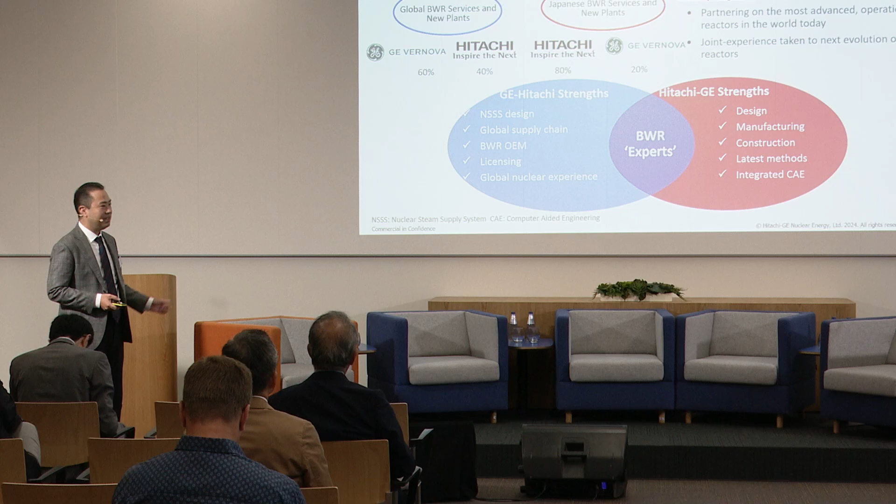I start with the Hitachi-GE overview. This slide may be the most important point of today's presentation, showing the Hitachi and GE Vernova Global Nuclear Alliance. As shown top left, we have GE Hitachi Nuclear Energy based in the United States, and Hitachi-GE Nuclear Energy based in Japan. Both companies have the same parent companies, GE Vernova and Hitachi, but the shareholder percentages are different.

GE Hitachi Nuclear Energy handles global BWR services and new plants, while my company, Hitachi-GE Nuclear Energy, handles Japanese BWR services and new plants. For example, if BWR X300 is built in Estonia, GE Hitachi will lead that new build project. If BWR X300 is built in Japan, Hitachi-GE will lead the project.

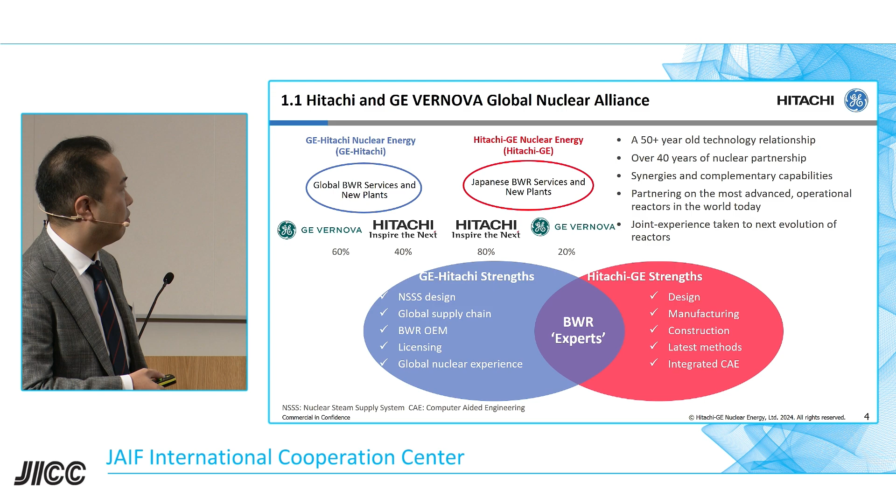GE and Hitachi have a more than 50-year-old technology relationship, and for the nuclear part, over 40 years of partnership. GE Hitachi and Hitachi-GE have synergies and complementary capabilities between the two companies. We are now partnering on the most advanced operational reactors in the world today, the BWR X300, bringing joint experience to the next evolution of reactors.

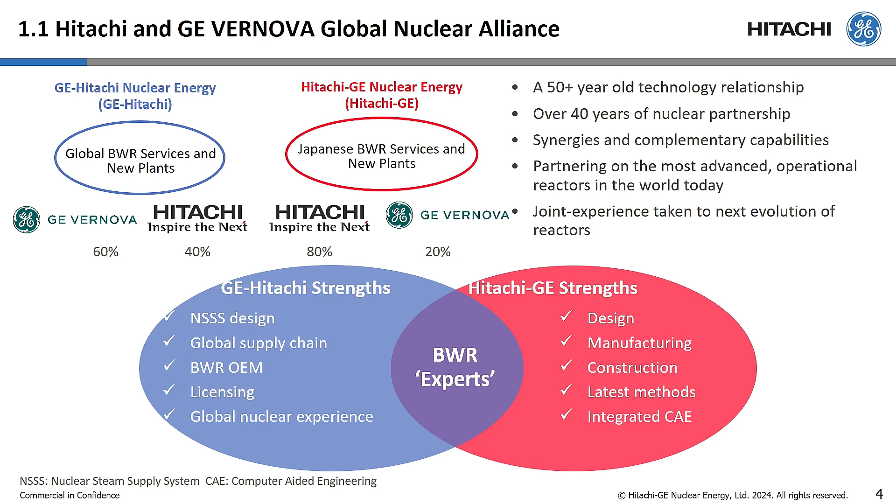GEH and Hitachi-GE have their own strengths. GEH's strengths are in NSSS design, global business, global supply chain, BWR OEM licensing experience, and global nuclear experience as a whole. Hitachi-GE has design capabilities and factories in Japan, so we can manufacture key components of BWR reactors. We also have rich construction experience in Japan for more than 40 years, and we can apply the latest construction methods together with integrated CAE.

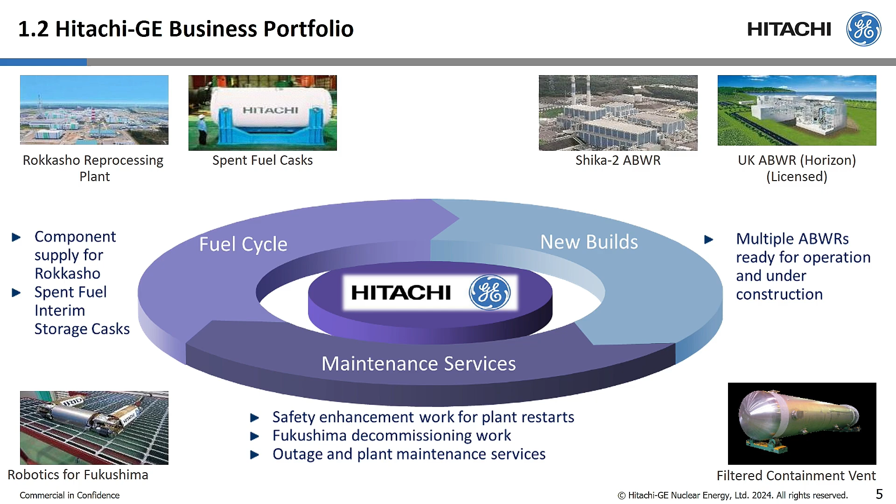This slide shows the Hitachi-GE business portfolio. HGNE covers front-end new builds to back-end business in Japan. As for new builds, multiple ABWRs are ready for operation, and we are currently focusing on the restart of existing plants, especially maintenance services such as safety enhancement work for plant restarts and Fukushima decommissioning work.

Once existing plants start again, we can begin outage and plant maintenance services. For the back-end, we provide component supply for the Rokkasho reprocessing plant, and we also produce spent fuel interim storage casks.

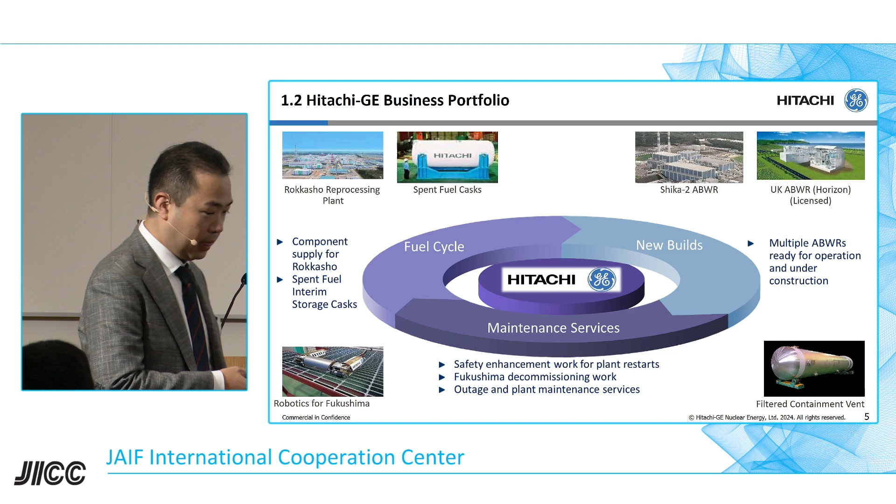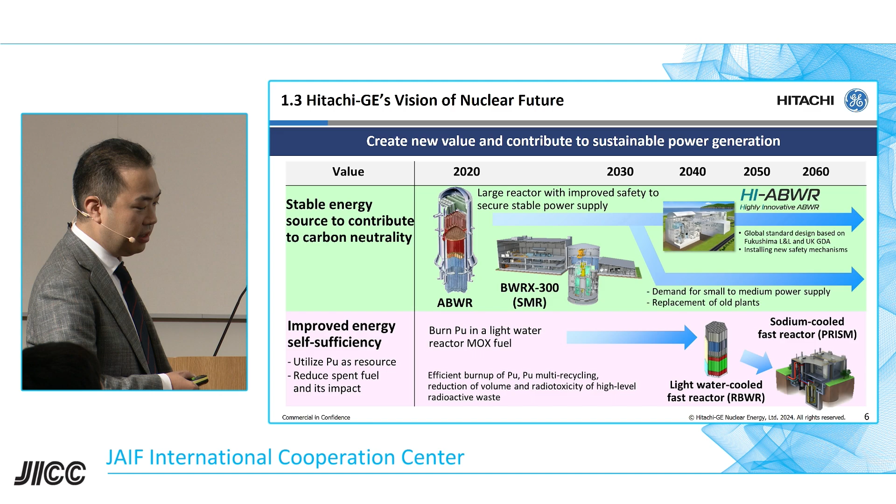This slide shows HGNE's vision of the nuclear future. The value of a nuclear power plant is to produce a stable energy source to contribute to carbon neutrality. We have constructed multiple ABWRs in Japan, which are large water reactors, and we are now developing so-called highly innovative ABWRs, equipped with global standard design based on Fukushima lessons learned and UK GDA experience, installing new safety mechanisms. This is also a large water reactor.

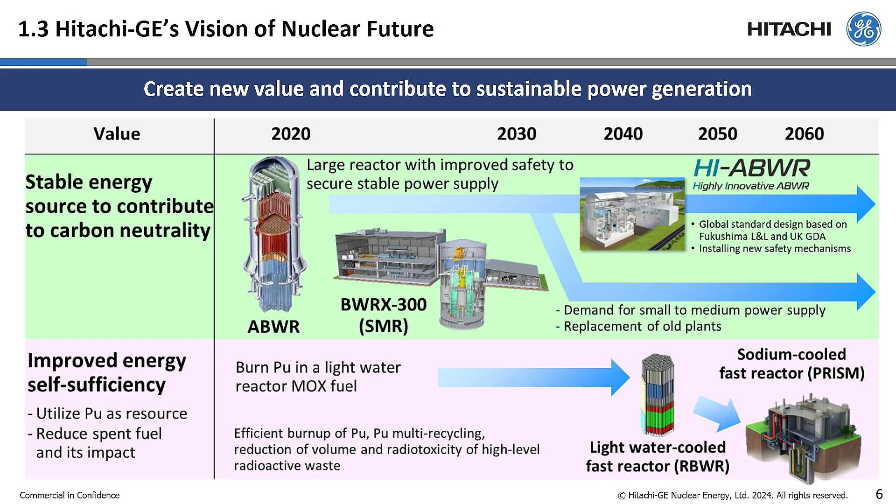In addition to large water reactors, GEH and HGNE are now developing BWR X300, which will meet the demand for small to medium power supply and replacement of old plants. Today's presentation will focus on the upper side of this chart, light water reactors.

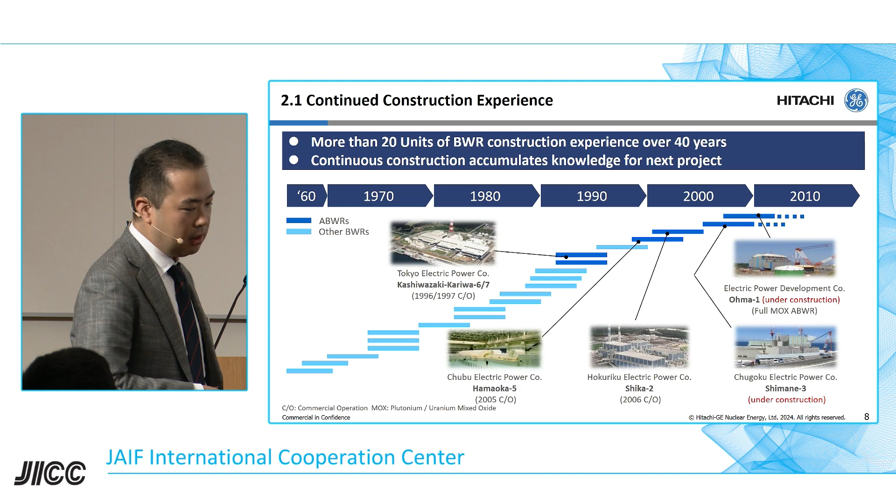Now I move on to Hitachi-GE experience. Toba-san already explained the continued construction experience of Japanese BWR plants. HGNE's construction experience began in the 1960s. Since then, HGNE has built more than 20 units of BWR, with over 40 years of construction experience. From the 1990s, HGNE has built 4 ABWRs, with 2 additional ABWRs under construction.

As Toba-san already touched on, Shimane 3, Ohma 1, and Higashidori are also part of the next series of ABWRs. So I can say we have continued experience in BWR construction, but I intentionally stopped this chart at 2010 because after the Fukushima accident, we have had no new construction activities in Japan. Later I will touch on what we did after the Fukushima accident to keep our capabilities and knowledge, so the younger generation can take over our capabilities.

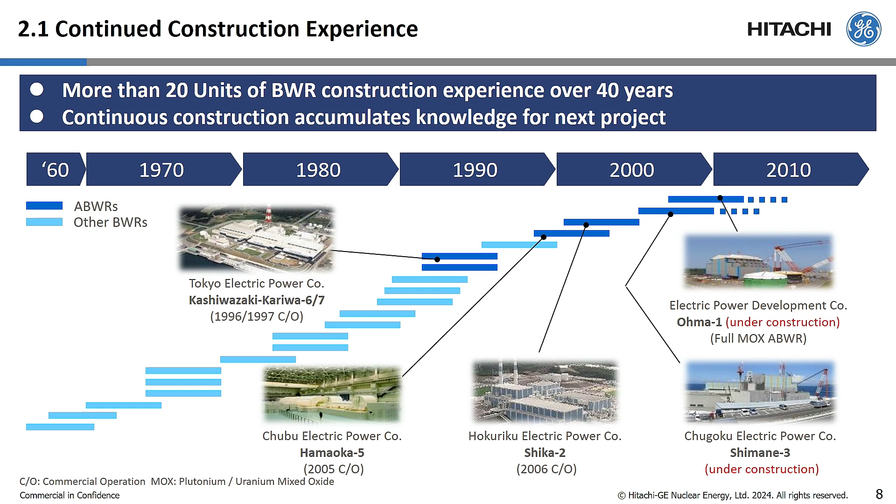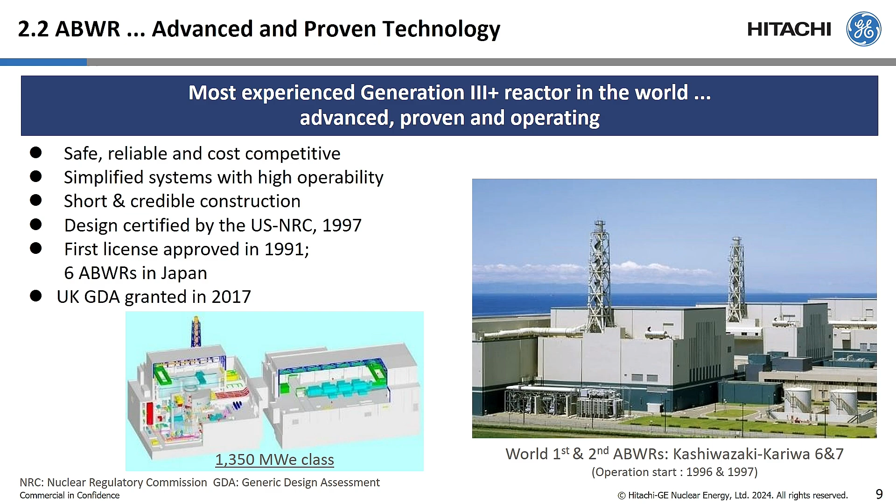Okay, so this is a brief introduction of ABWR. So HGNE's latest large reactor design is ABWR, which is the most experienced generation 3+ reactor in the world. So features of ABWR are safe, reliable, and cost competitive, simplified system with high operability, short and credible construction.

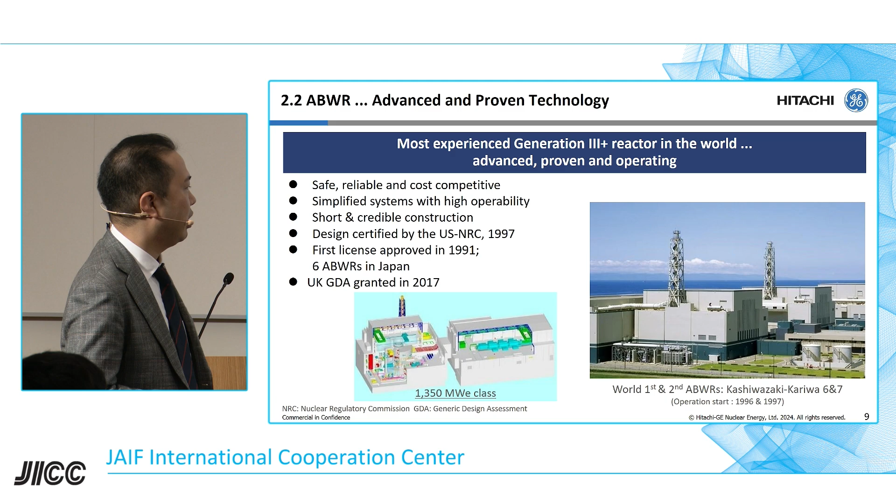And we got design certified by the US NRC in 1997, and the first license approved in 1991, and now we got 6 ABWRs in Japan. And UK GDA granted, we got GDA in 2017. So this is a picture of the world's first and second ABWRs, Kashiwazaki-Kariwa 6 and 7.

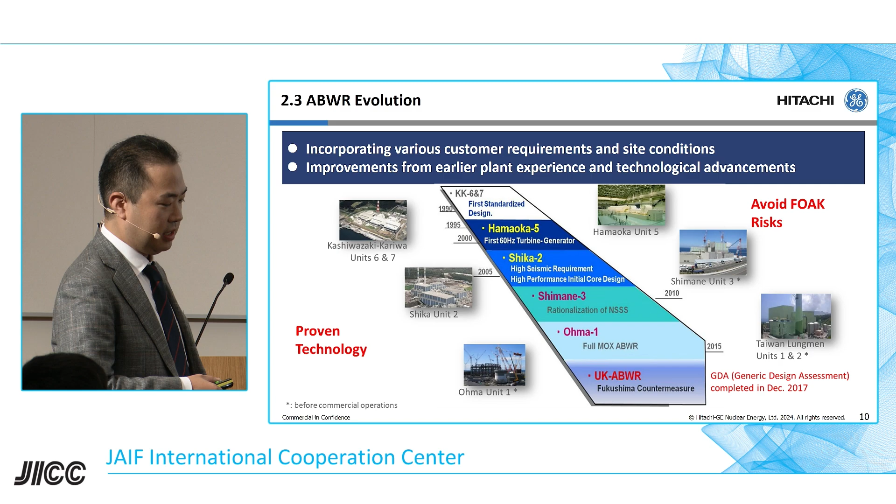So although ABWR is the latest design, it's been incorporating the various customer requirements and site-specific conditions in Japan and overseas. So starting from Kashiwazaki-Kariwa 6 and 7, each plant has each new feature, but the important thing is that ABWR is proven technology, and ABWR can avoid FOAK risks.

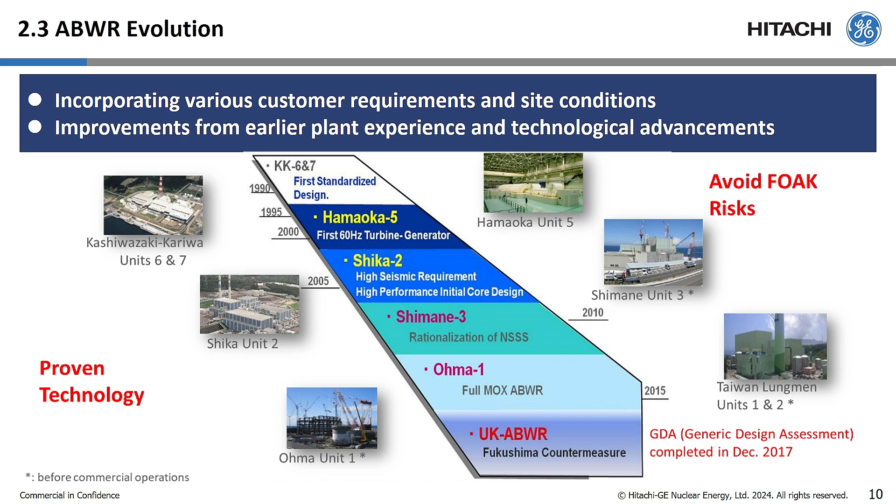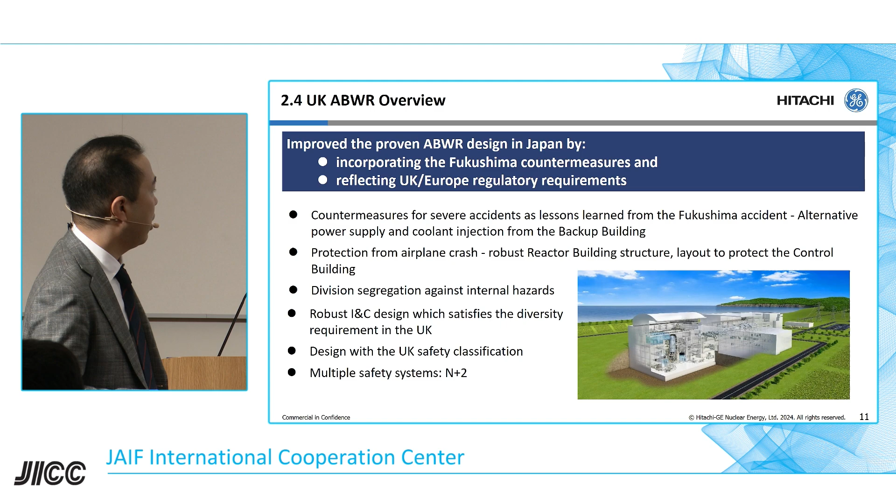So UK ABWR applied countermeasures for severe accident as lessons learned from the Fukushima accident, alternative power supply and coolant injection from backup building, and protection from airplane crash, which enables the robust reactor building structures layout to protect the control building from airplane attack, and division segregation against internal hazards, robust I&C design, which satisfies the diversity requirement in the UK, and design with UK safety classification, and multiple safety systems, and so on.

And now we are developing highly innovative ABWR. We call it HI-ABWR. And the concept of HI-ABWR is further new safety mechanisms implemented based on international standard ABWR. So likewise UK ABWR, HI-ABWR is equipped with innovative safety systems, like intensified measures for natural disaster, terrorism, internal hazards,

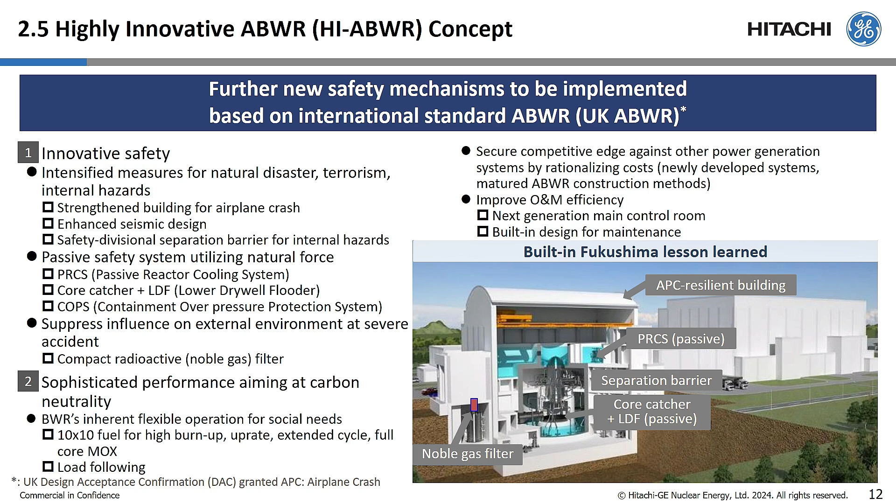and also HI-ABWR will have a passive safety system utilizing natural force and suppress influence on the external environment at severe accident. So FCVS will be equipped for HI-ABWR. And the aim of this HI-ABWR is to support society to achieve carbon neutrality.

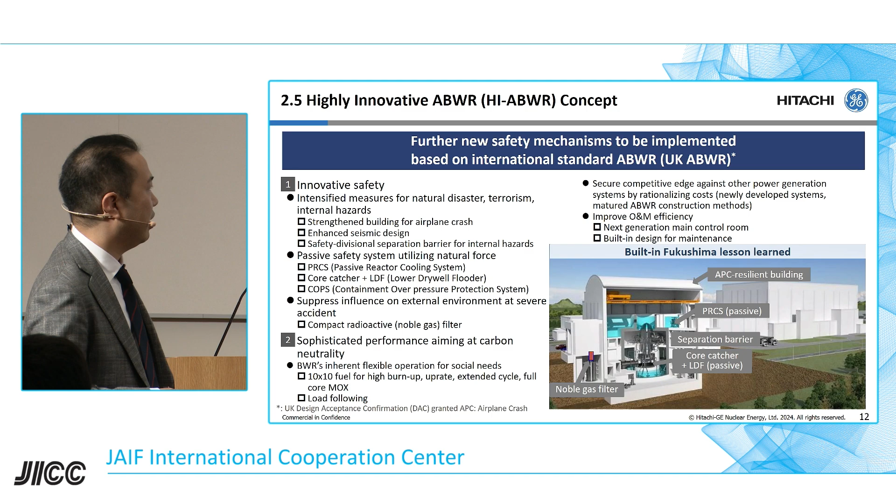Okay. And now I would like to move on to the new build construction challenges, which we had in past experience. So new nuclear construction has big challenges; historically, we face over-schedule and cost overrun projects, especially for large reactor projects, and significant delays and rework due to many factors. So recently we see those things in US projects or European projects.

And our approach for new construction is a comprehensive, detailed, well-coordinated project development phase prior to construction start. So we have 4 methods to do this. The first one is integrated engineering, design, and construction management process and tools. Project-specific detailed design that is well advanced prior to construction. And also, of course, we have an integrated project-specific supply chain.

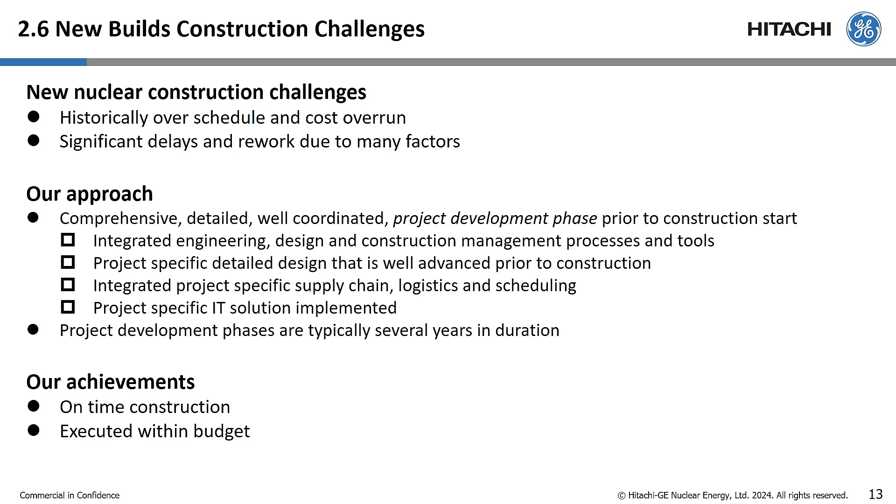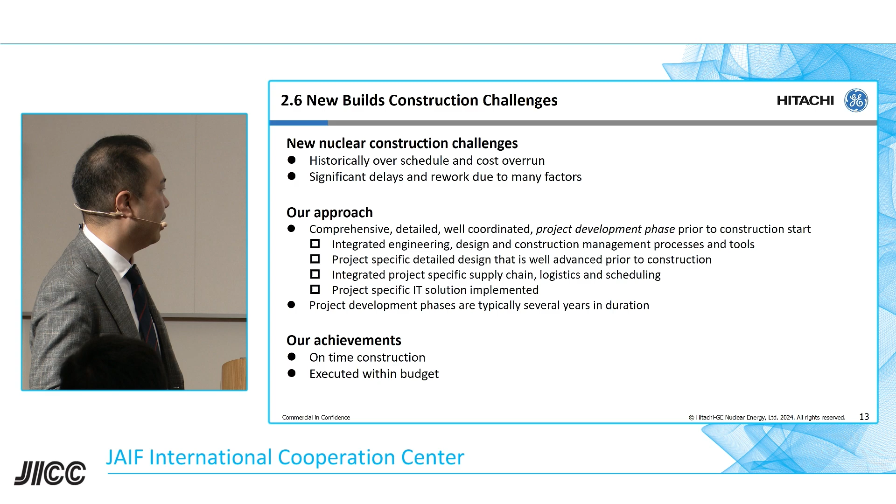So this is the strength of Japanese industries. So supply chain plus logistics and scheduling. And project-specific IT solutions implemented in the project. So project development phases are typically several years in duration. So this project development phase is very crucial. And as a result, we achieved on-time construction, and we could execute the project within budget.

So this slide shows the track record of ABWR on-time construction. So from Kashiwazaki 6 to Shika 2, the total planned duration and actual duration are exactly the same. So this is a great achievement of Japanese BWR projects.

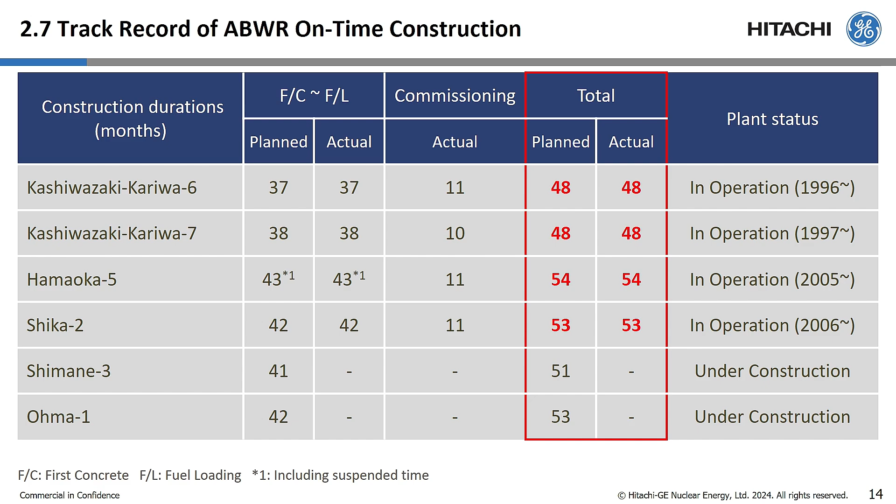And I would like to emphasize that HGNE, Hitachi, alone cannot make this on-time and on-budget construction. We need a strong client, owner or utility, and construction companies, and very good suppliers. Only if we can have those companies, then I think we can make the project on time and on budget.

And just one point, as you can see, the figures of Hamaoka 5 and Shika 2 are slightly longer than Kashiwazaki-Kariwa. I think this is the leveling of the peak number of staff, and to optimize the plant schedule.

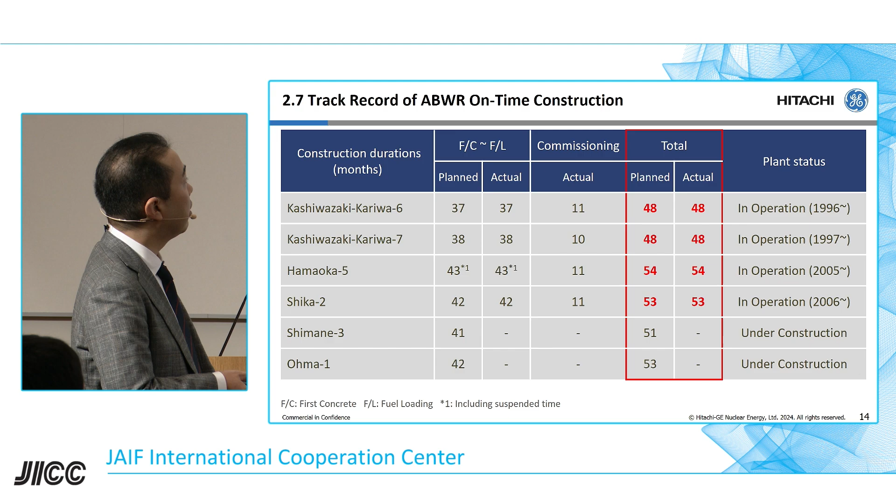So this slide shows HGNE's construction strategy. So as you can see on the left hand of the slide, HGNE categorized nuclear power plant construction characteristics as large work volume, so more than 1,000 people are working on site in the construction phase, and long period work, it takes more than 5 years, and many interfaces with project participants.

So client, construction company, HGNE and suppliers, and very, very many documents and records, and we need traceability. So we have strategy and methodologies to overcome these characteristics. The first one is improve on-site productivity.

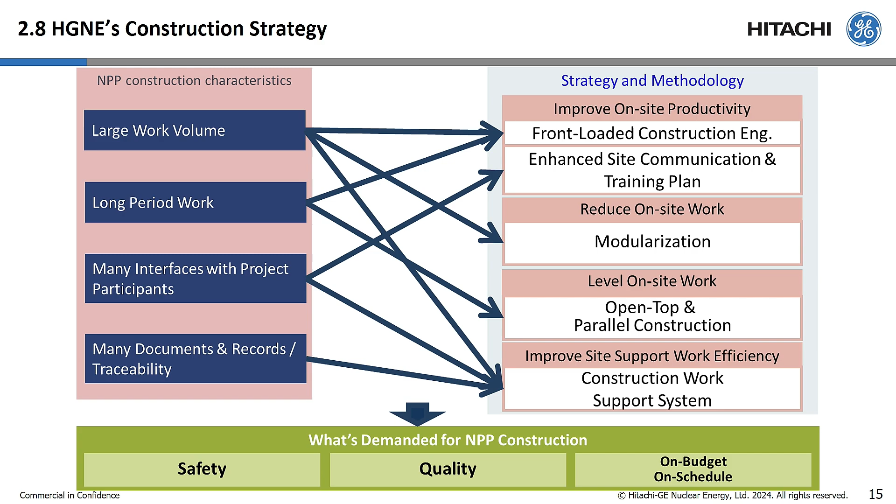So we apply front-loaded construction engineering prior to start of construction. And we apply an enhanced site communication and training plan. And also, we will reduce on-site work by applying modularization. So this is one of the features of SMR as well.

And also, we level the on-site work by applying open top and parallel construction. And also, to improve site support work efficiency, we apply construction support systems. Then I think we can achieve a good safety, quality, on budget and on schedule project.

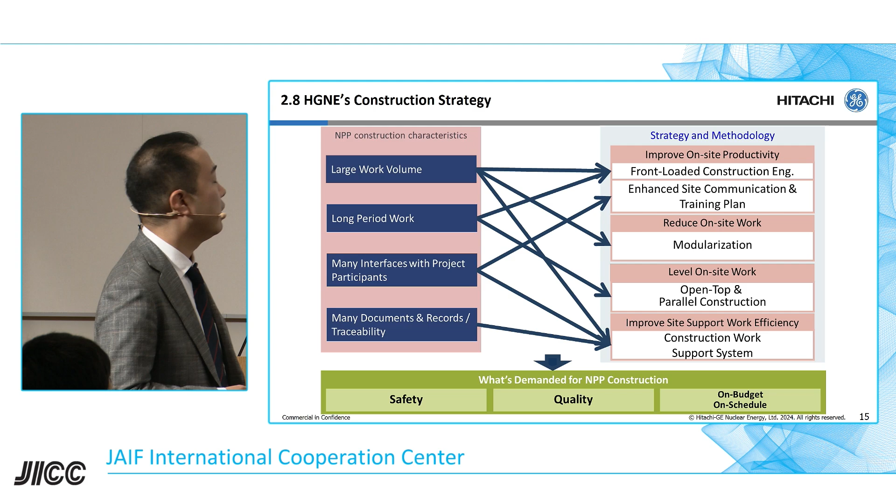So the first strategy is front-loaded construction engineering. So compared to the previous design process, front-loaded construction engineering begins in parallel with basic and detailed design. So the advantage of this strategy is to reduce and minimize design changes during construction. Construction engineering gives inputs to basic design, and then detailed design will give inputs from the plant design.

So we make the circulation of construction engineering to basic design and detailed design to construction engineering. So this iteration and circulation of the design process will result in improved on-site productivity by just doing it as planned. So if we can fix everything before start of construction, we can make construction as planned. So this is our strategy of front-loaded construction.

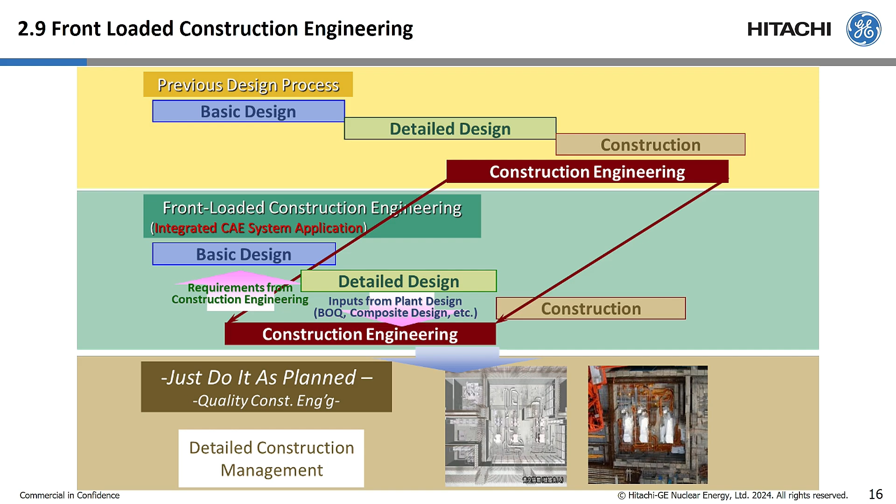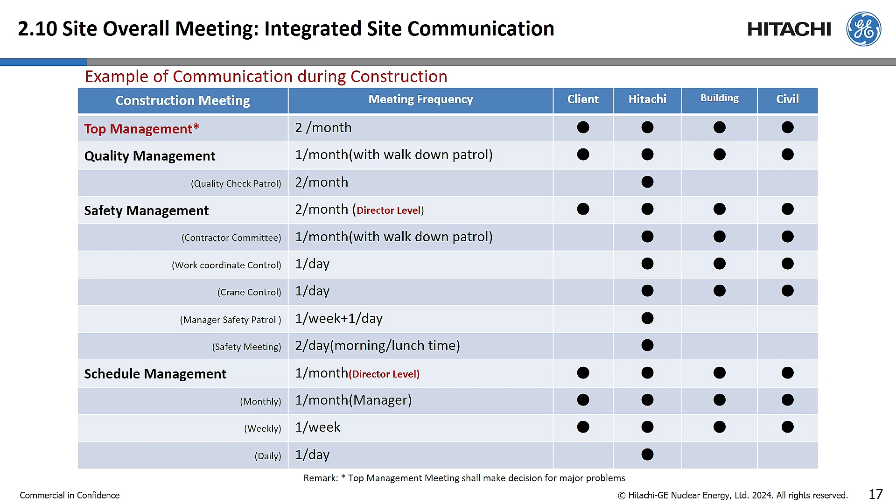And this slide shows the site overall meeting to improve integrated site communications. So from top management to quality, safety, and schedule, each member of the project will join the same meeting to establish the same understanding and details of the project. So I think this is one of the features and strengths of how a Japanese project can make an integrated project, integrated team. So this is an example of communication during construction.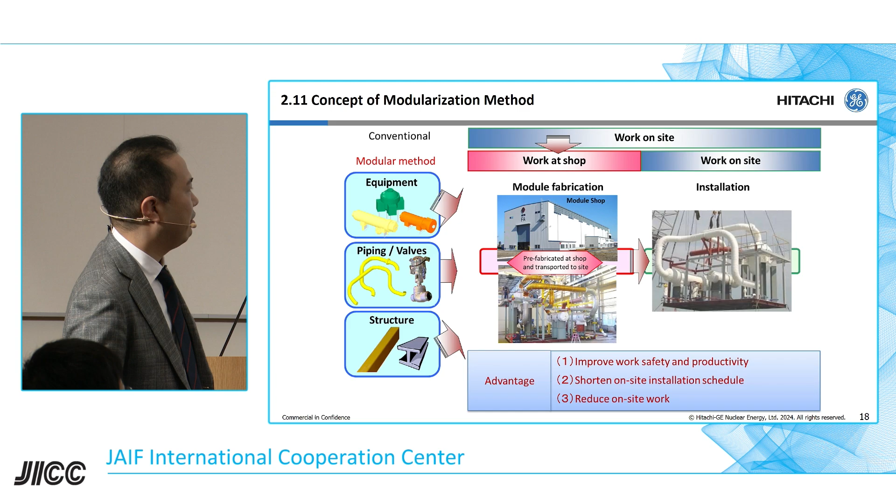And the next one is about modularization. So this slide shows the concept of the modular method. So by assembling and fabricating equipment, piping, valves and structures at a module fabrication shop, we can reduce the work on site, which will lead to a shortened on-site installation schedule and improve work safety and productivity. So for many years, HGNE have utilized this modularization method. So this is not a very new concept, but we have already implemented it in many projects in Japan.

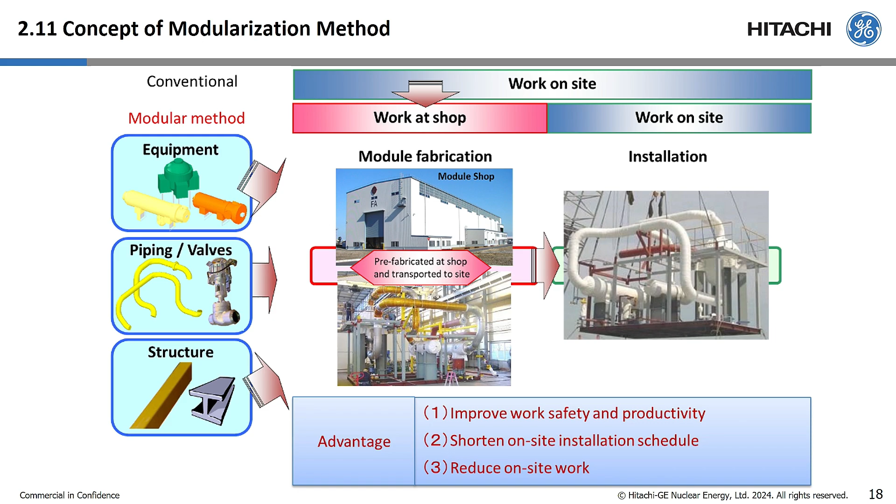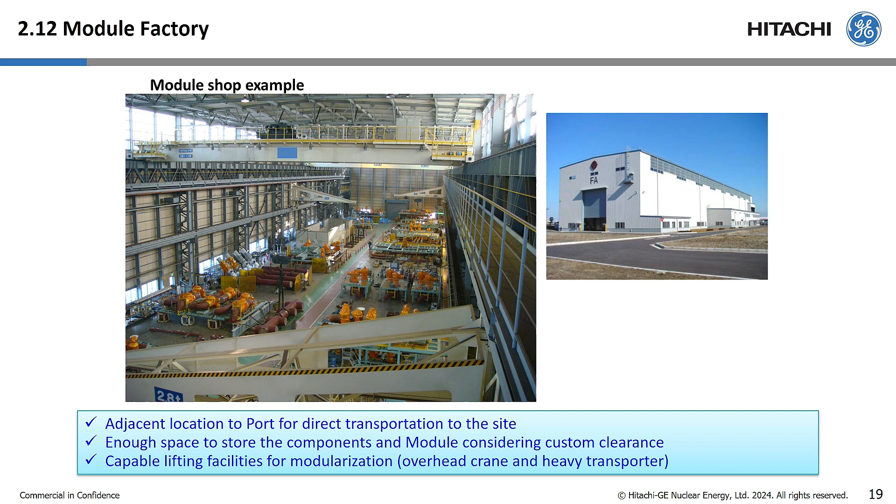So this slide shows the image of the module factory. So this is the inside of the module shop to assemble equipment, valves, and others. So this module shop location is adjacent to a port for direct transportation to the site. And the module shop needs to have enough space to store the components and the modules considering customs clearance, and capable lifting facilities for modularization. So this module shop will be located nearby the site. I think this is also good for the local economy as well.

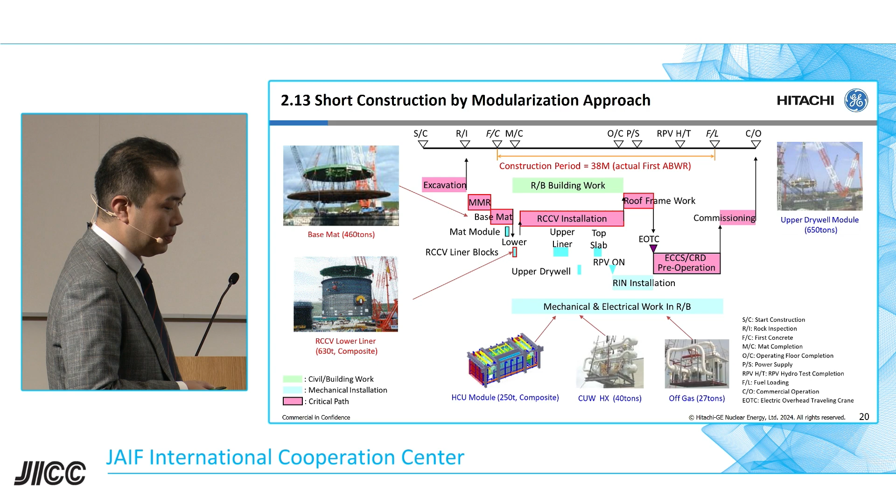And this slide shows the sequence of the construction period. So the nuclear power plant construction sequence has complicated critical and subcritical paths. The Hitachi BWR construction sequence proceeds concurrently with civil building works and MEH works. So by applying modularization and a parallel construction approach, past projects could achieve a short construction period.

So the green activities are civil activities, the blue one is mechanical, and the red one indicates the critical path from rock inspection to fuel loading. So one of ABWR's features is that the critical path is composed of mainly civil-related activities.

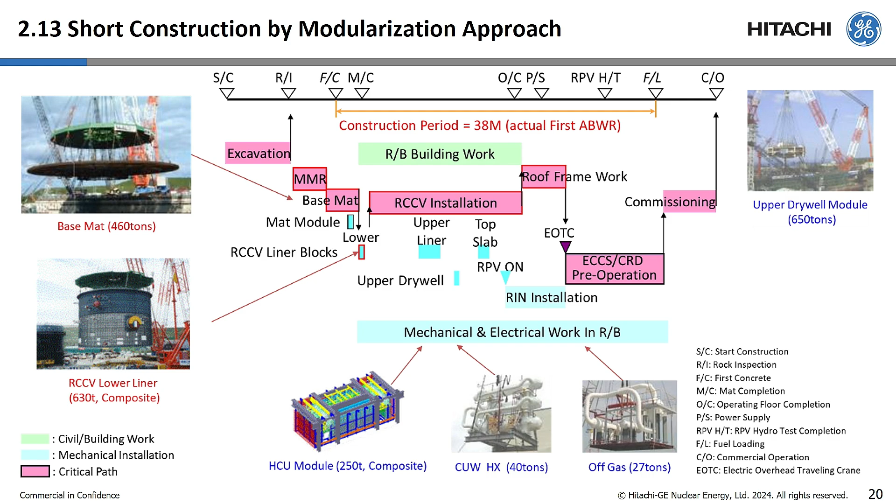So this picture is the mat module. The mat module is composed of mat, rebar, and anchor bolts for pedestal and embedded plates, and so on. And this one is the RCCV lower liner and HCU, CUW. So we have many large modules which have already been used in past projects in Japan. So these are examples of large modules. The left-hand side is a reactor building, and the right-hand side is a turbine building. So both buildings apply many large modules for construction of BWR projects.

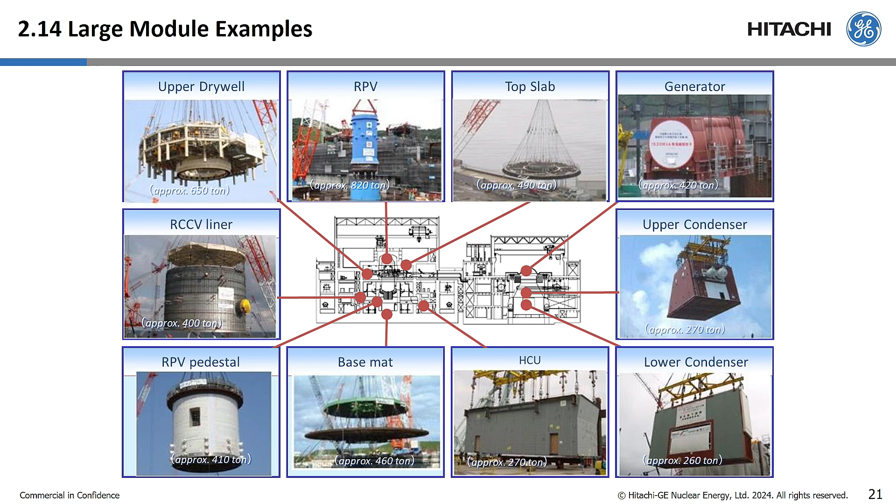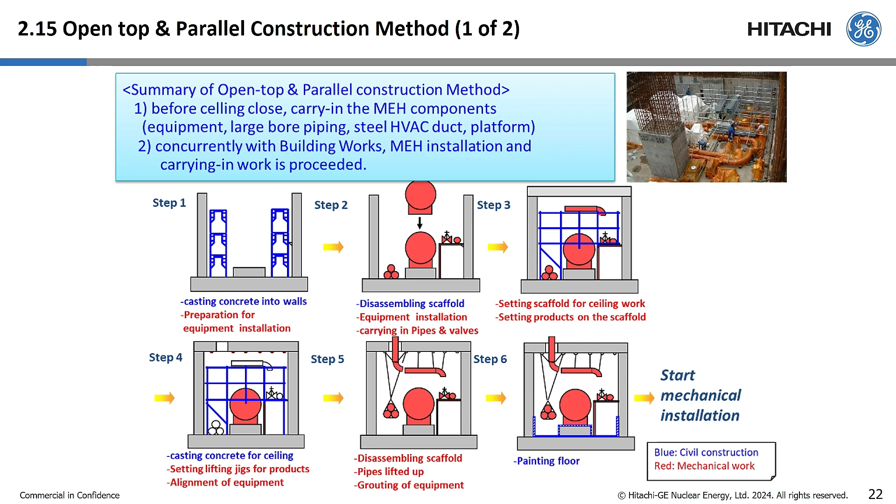And this slide shows the open top and parallel construction method. So these figures show step 1 to step 6. And the summary of the open top and parallel construction method is, before closing the ceiling, which is step 3, we carry in the MEH components, which are equipment, large bore piping, steel HVAC ducts, platforms. We install them in the rooms before closing the ceiling. So building works, MEH installation, and carrying-in work can proceed concurrently.

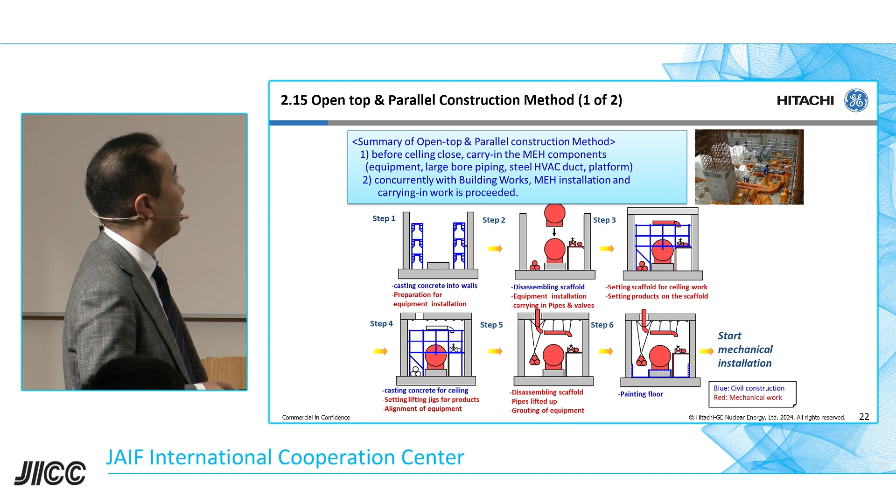So the blue one is civil construction, and the red one shows mechanical work. So from step 1, we will do both civil and mechanical works in parallel. So this is the open top and parallel construction method. And this is the image of the open top and parallel construction method. So the upper side of the slide shows the image of the sequence of construction activities, and the lower picture shows actual execution.

So this open top and parallel construction requires conditions like very detailed pre-planning, which requires complicated area handover, and we need close collaboration of civil side and mechanical, electrical, and HVAC side contractors. And also we need on-time delivery of components. If we miss the delivery of components on time, then we cannot proceed with the work as planned.

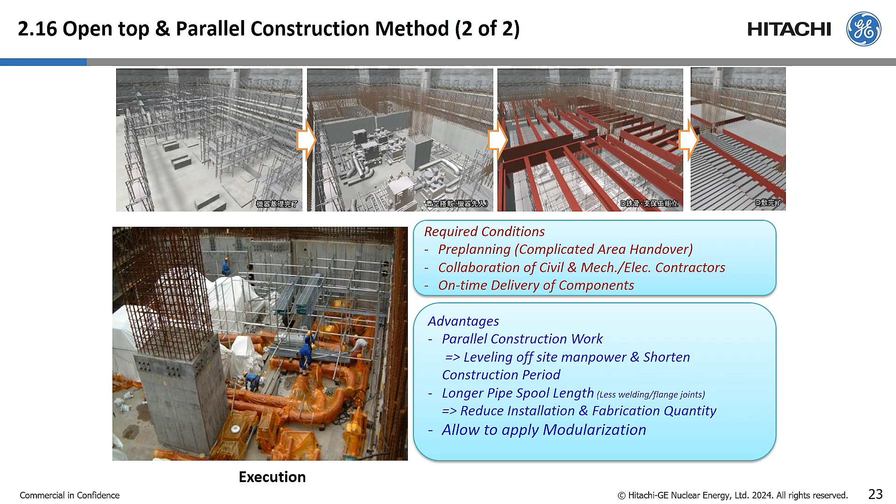So there are very many requirements and conditions, but if we can meet these conditions, we will have the advantages of parallel construction work, which can be leveling off the site manpower and shortening the construction period, and longer pipe spool lengths, less welding and flange joints, which can reduce installation and fabrication quantity, and also allow us to apply modularization, because we can bring a very big module into the room because the roof is open.

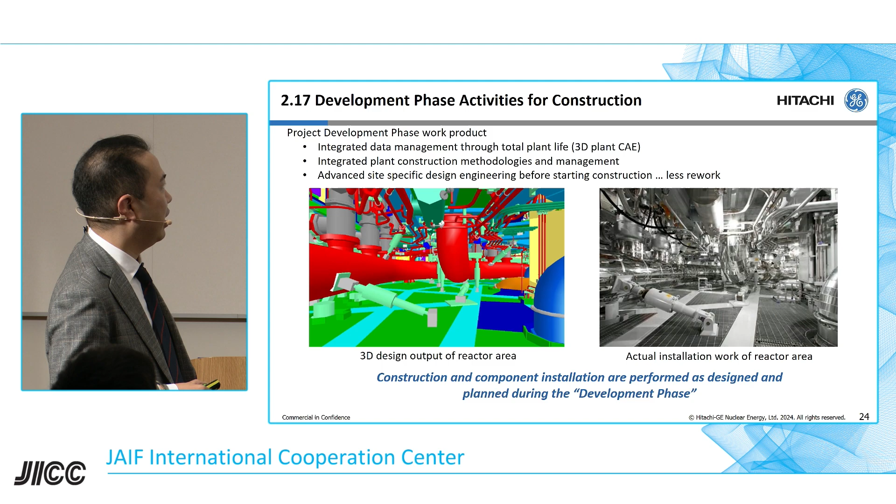So during the engineering phase, hundreds of engineers will work on the development and the plant design, but once we enter the construction phase, thousands of people will work on site. So completing design work before starting construction will be a very important feature for this kind of very big construction project. Construction and component installation are performed as designed and planned during the development phase. So this is our strategy and what we want to achieve.

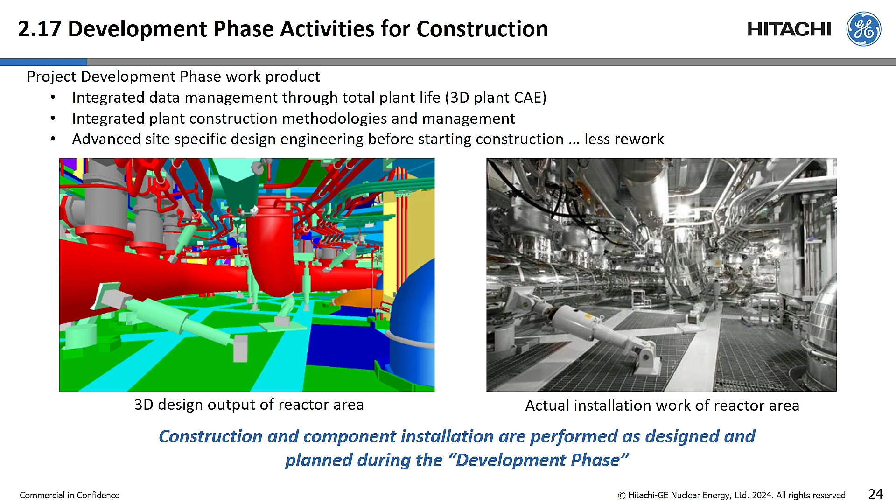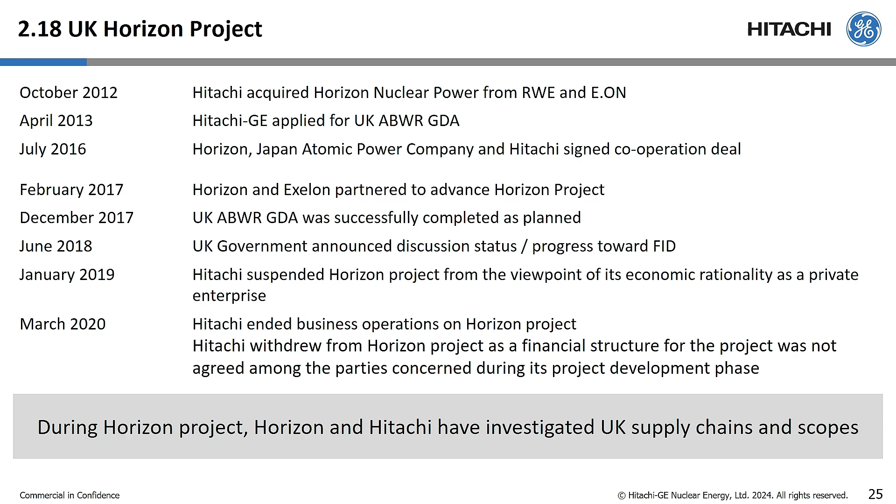So we learned that a successful project already demonstrated somewhere in the world will be very important for potential investors to see the project viability. If the risk perception is low, that drives the discount rate lower, which makes for lower electricity cost. So this is one of the lessons learned I had in this project. And also during the Horizon project, Horizon and Hitachi investigated UK supply chains and scopes.

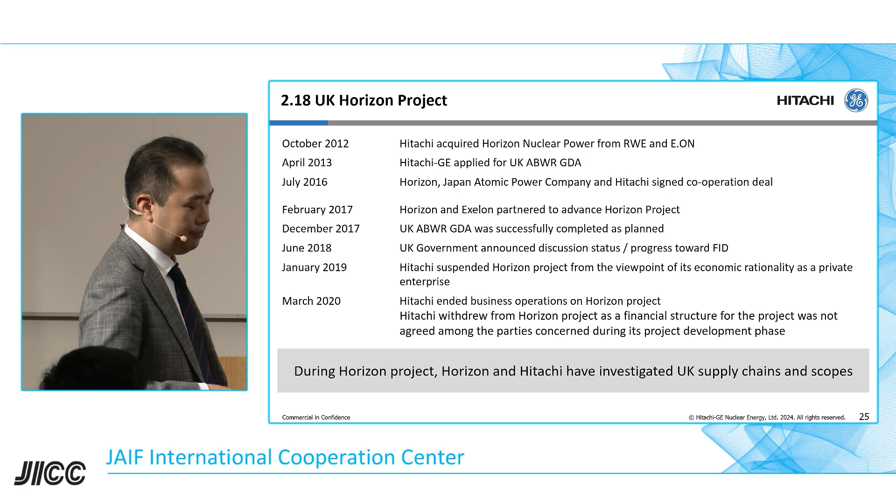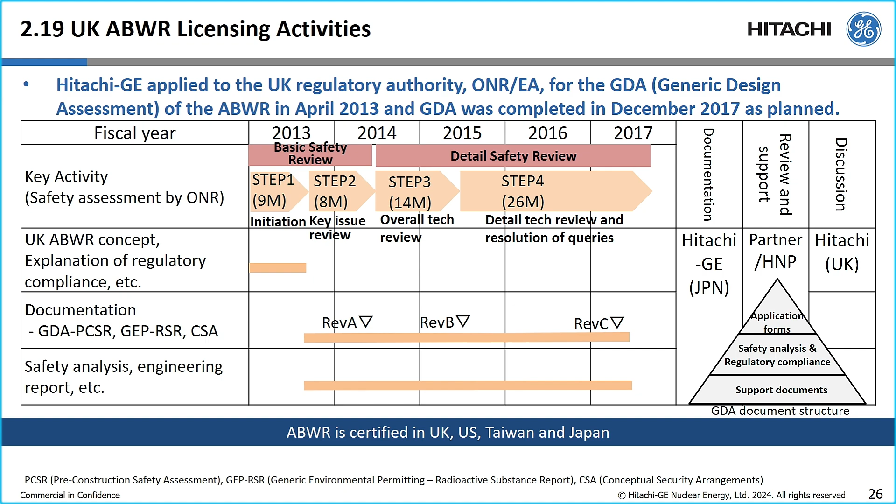So we prepared a lot of application forms and safety analysis, regulatory compliance, and support documents. So this is one of the very important assets of the project. Now ABWR is certified in UK, US, Taiwan, and Japan. So now I move on to the overview of BWRX-300 and our contribution to the project.

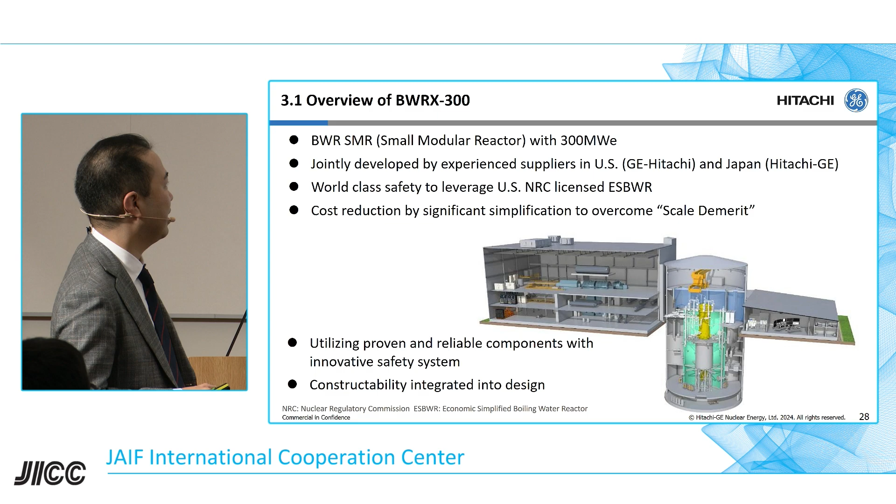This is the overview of BWRX-300. So this is a 300 megawatt reactor, jointly developed by GE Hitachi and Hitachi-GE. And this reactor is based on ESBWR, which was licensed by US NRC, and cost reduction by significant simplification to overcome scale demerit. So in general, the smaller reactor is a disadvantage in terms of economics, but by simplifying many systems and features with good safety features, we are trying to overcome this scale demerit.

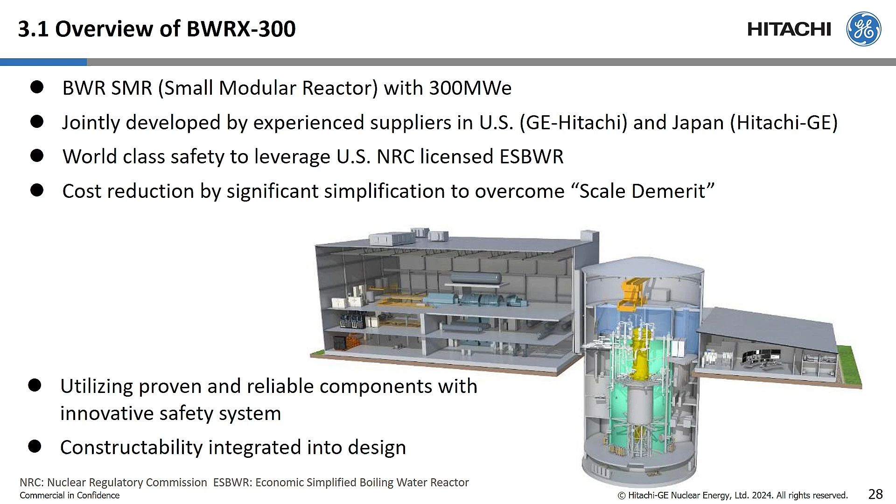And utilizing proven and reliable components with innovative safety system. So this is also an important aspect. So this BWRX-300 is based on existing BWR technologies and constructability integrated into design. So we are applying modules into BWRX-300 design.

And these are key features of BWRX-300. Small light water reactor with enhanced safety, economy, construction and flexibility. So we have innovative safety systems such as the isolation valve integrated directly attached to the RPV to reduce LOCA, and isolation condenser system, the passive cooling system, to keep 7 days cooling without power or actions.

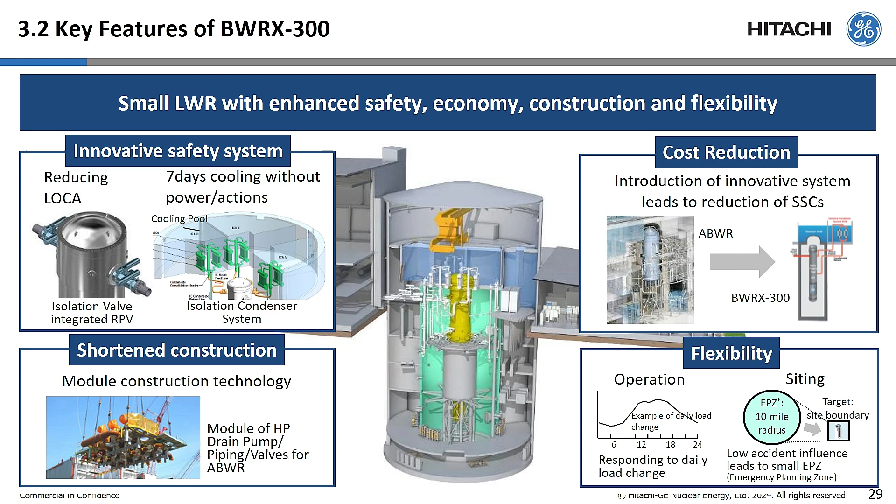And we apply modularization to achieve a shortened construction period. And also by simplifying the systems, we try to make cost reduction, competitive construction cost. And also we have flexibility features in terms of operation and siting.

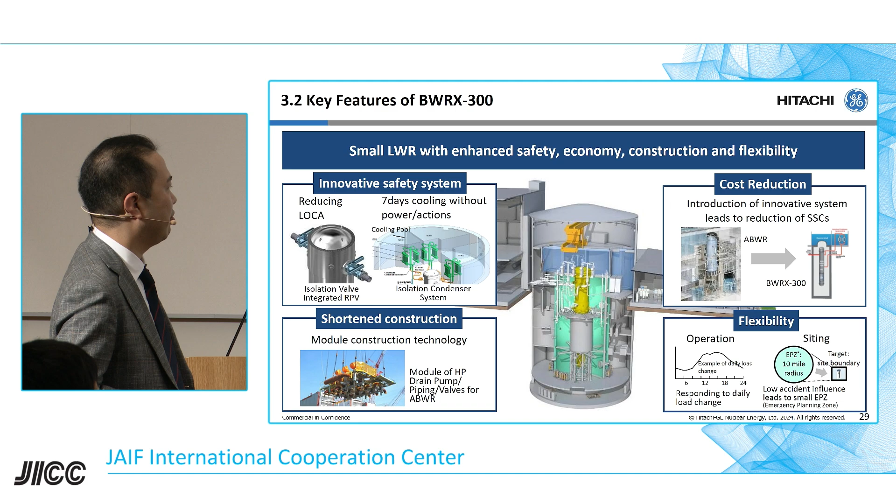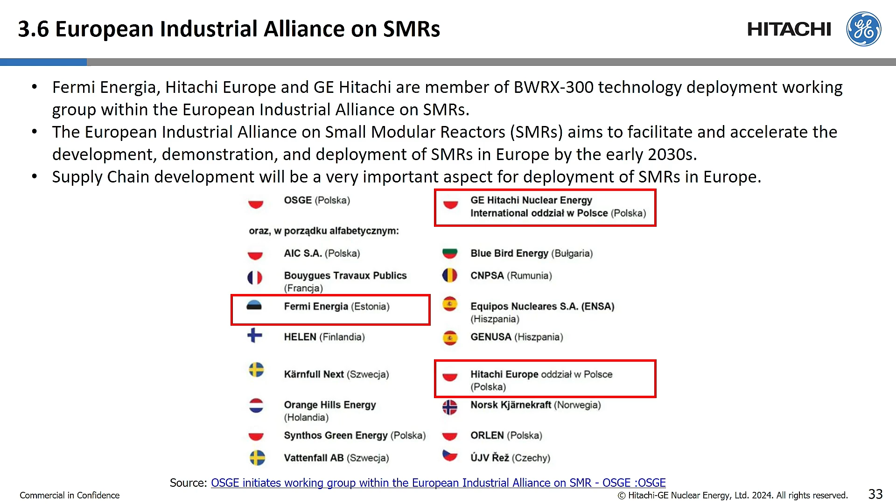And also, I would like to touch briefly on the European Industrial Alliance on SMRs. So together with Fermi Energia and GE Hitachi, Hitachi Europe is also participating in these alliance activities. So our colleagues in Poland are joining these activities. So I hope there will be good interactions between these companies for the future deployment of BWRX-300 in Europe.

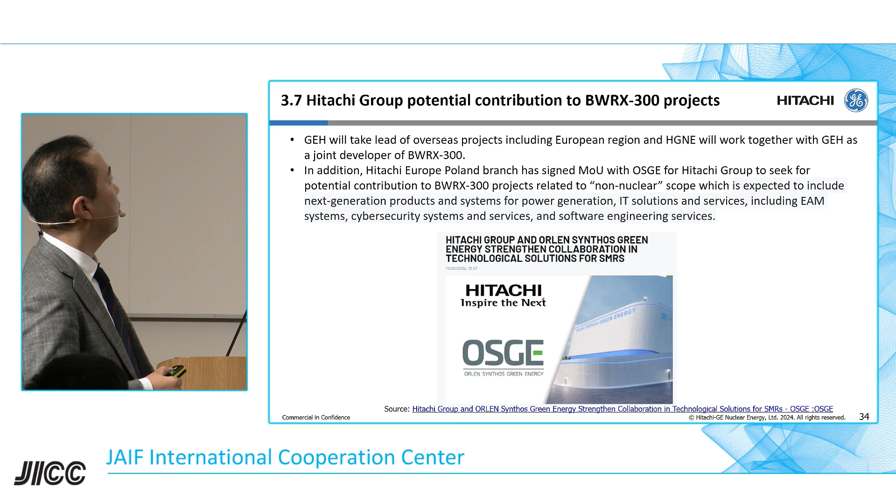And also, I would like to briefly touch on the Hitachi Group's potential contribution to the BWRX-300 project. So GEH will take the lead of overseas projects, including the European region, and HGNE will work together with GEH as a joint developer of BWRX-300. And in addition, Hitachi Europe Poland branch has signed an MOU with OSGE to provide some contribution to the BWRX-300 project. So as a whole company, we would like to make a good contribution to BWRX-300.

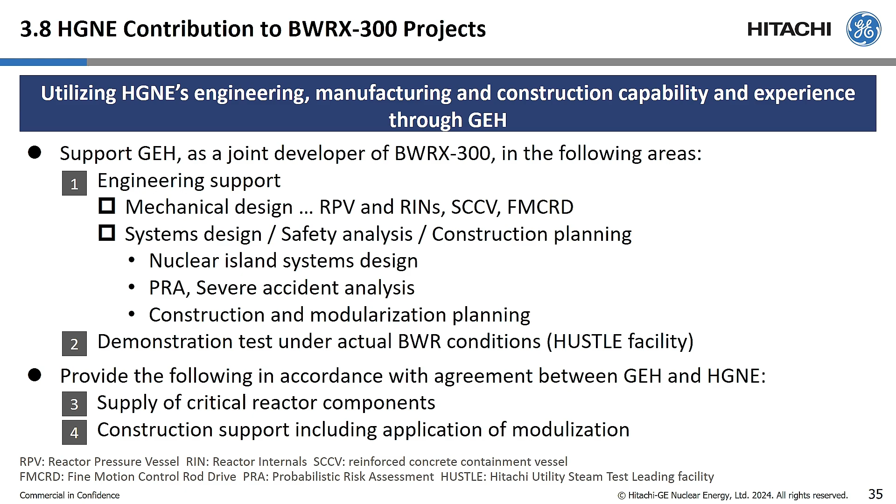And this slide shows HGNE's contribution to BWRX-300 projects. So by utilizing HGNE's engineering, manufacturing, and construction capability and experience, we support GEH as a joint developer of BWRX-300 in the engineering support and demonstration test. We have testing facilities in Japan, so we contribute to this demonstration test and also provide the following in accordance with the agreement between GEH and HGNE, such as supply of critical reactor components and construction support, including application

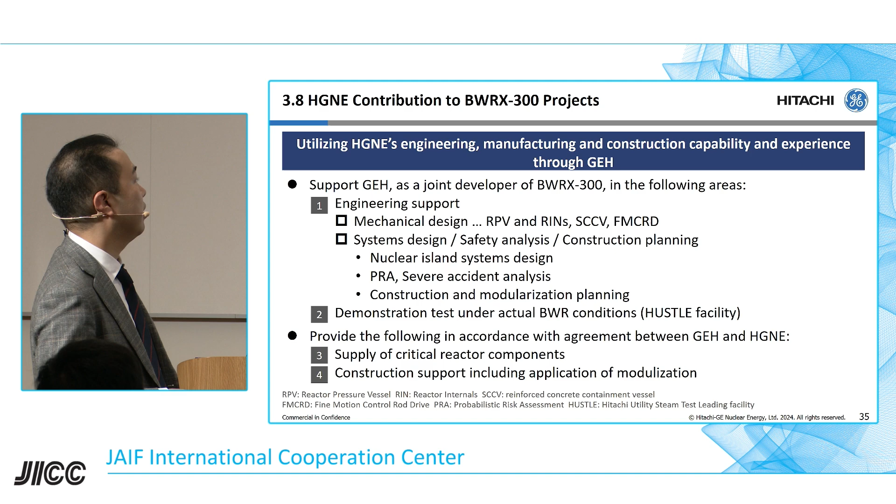of modularization. So we need this kind of support project to keep our resources and knowledge, to keep our suppliers. So this is a very good opportunity for us to keep our supply chain in the future. So we can supply these reactor components because the reactor internals and fine motion control rod drives (FMCRD) are almost the same in the BWRX-300. So we can leverage the ABWR manufacturing experience into this BWRX-300.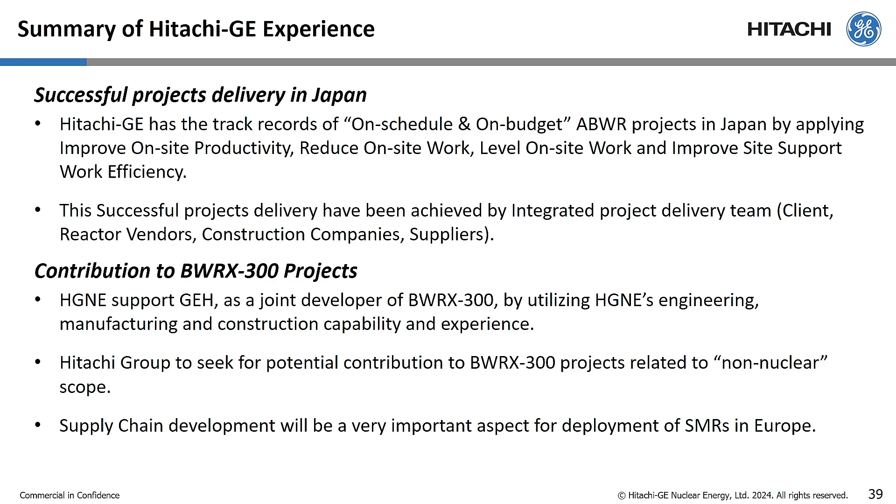So HGNE supports GEH as a joint developer of BWRX-300 by utilizing HGNE's engineering, manufacturing, and construction capability and experience. Hitachi Group also seeks potential contribution to BWRX-300 related to non-nuclear scope, and supply chain development will be a very important aspect for deployment of SMRs in Europe, because we have a very strong supply chain in Japan. But if we try to bring this plant to other parts, we need to develop good supply chains in such regions. So this is a challenge, but HGNE would like to support and contribute to these BWRX-300 projects.

So this is the end of my presentation. Thank you for your kind attention. Are there any questions?

Are you willing to cooperate with local subcontractors as well? Like, can Estonian companies help you build this? Yes, of course, we would like to cooperate with each other. So the first step is to go to the country and investigate what kind of supply chain Estonia has. It will take a long time, but this is a very important process, and we need local supply chains. So I hope so.